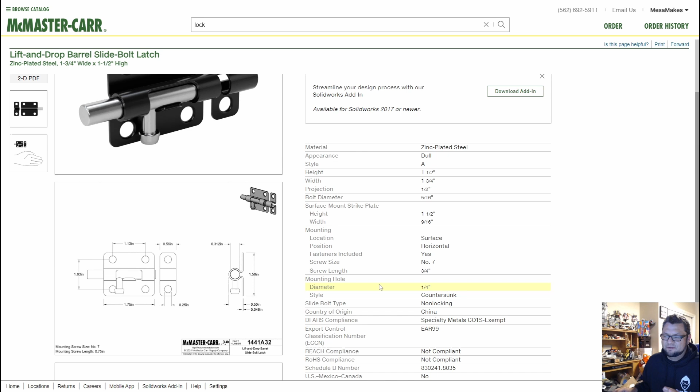So when I was doing this, the reason why I needed to make an account is I needed to know what size these fasteners were going to be that went in here, and it tells me number 7. But I figured out some workarounds and some cool things that we can do. So let's jump into Onshape and we will show you what's next.

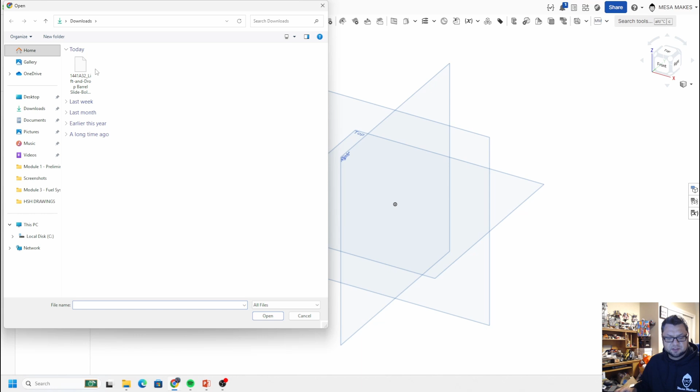So just like always, you're going to want to start a document, and you can do this from the home screen too, but I seem to like doing it this way. So if you click the plus down here at the bottom, you'll see this import button. So we'll go ahead and click import, and it's going to bring you to your downloads. Go ahead and just pick that file that we just downloaded.

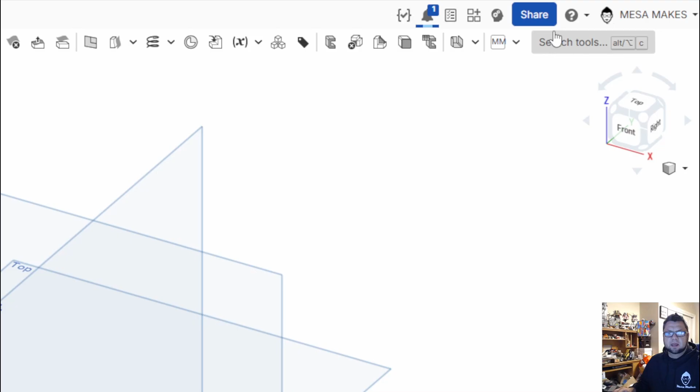Click open, and it's going to ask you if you want to import appearances, import material density. There's a bunch of these different things you can do. Everything I've always done, import appearances, always seems to work fine. So we're just going to say import, and you'll see up here in the little bell, it's thinking, it's loading, and if we click on that, you'll see

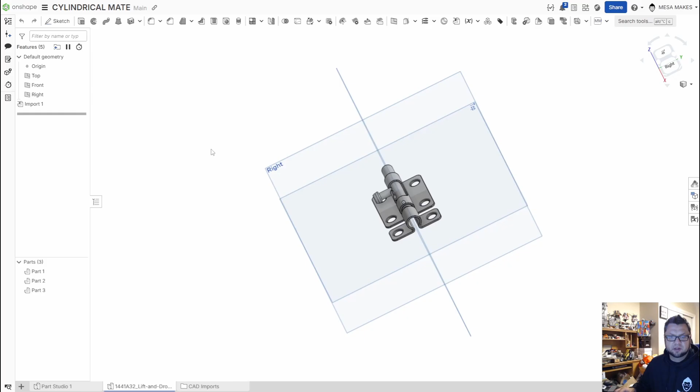it is now completely uploaded. It's taken care of, and you'll see down here at the bottom I now have a folder called CAD imports, and in here I have that bolt. So I can go into this part studio and I can see there is my latch with the bolt, all the same colors. In CAD imports, I can see that actual SolidWorks file, so if I ever wanted to download it again, I could do that as well.

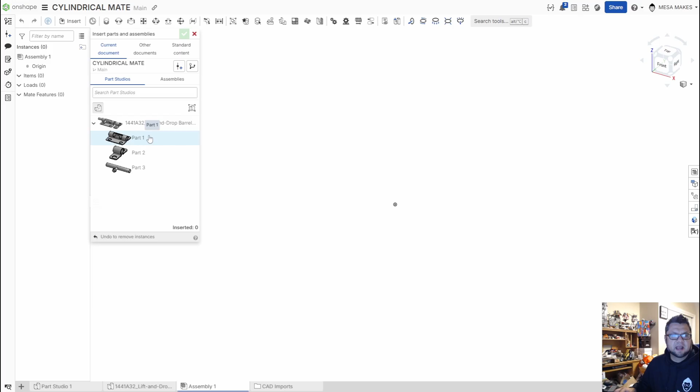But this isn't about drawing on here. What we want to do is insert a new tab and create that assembly. So we're going to start with an assembly, and we're going to say insert from our current document, and I could pick each part individually, but if you click the parent drop down menu, you'll get everything.

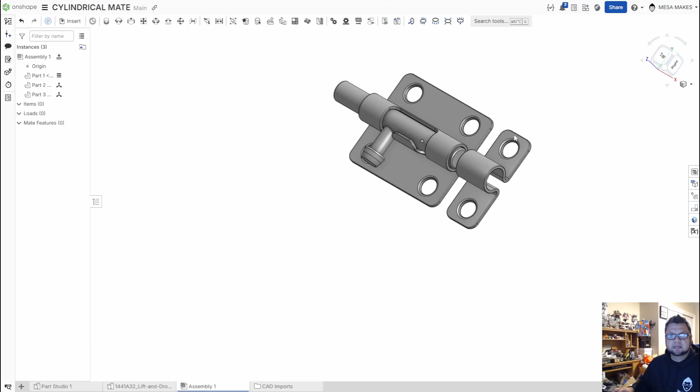I'll click accept, and now we are good to go. So one thing I want to show you is we want to lock this plate. We want to fix this plate in. So we're going to wrap around to the back. We're going to right click here, and we're going to say fix, and now you'll see I can move everything else, including this barrel, but I can't move this plate here.

But to keep things aligned, we're going to do this as well. So I am going to fix that one in place as well, because these two hasps need to stay together. And really all we're dealing with today is this barrel that's going to be sliding back and forth.

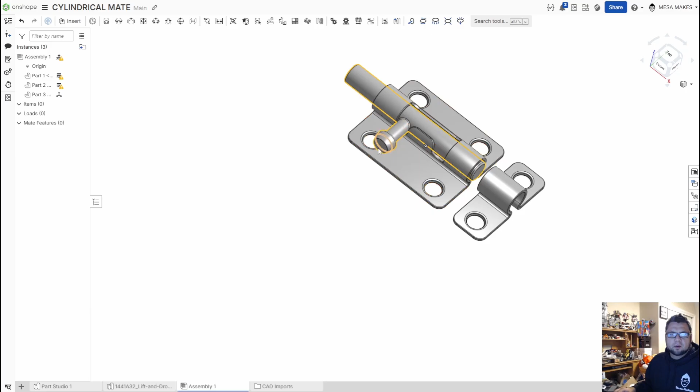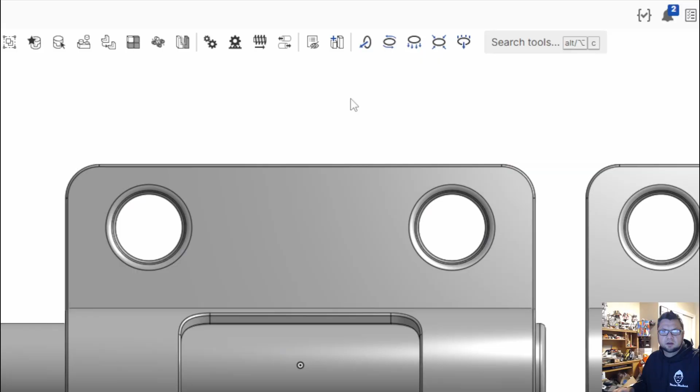So one thing I want to do, just for visual sake and to figure out later on when we go to do our screws, I need a plate. I need something for this to attach to and mount to. I could go back in my part studio and draw it again, but a feature that's kind of overlooked, and we'll do a whole video on this eventually, but if you come in right here, let me zoom in for you really quick, and you see this one that says create part studio in context, go ahead and click that. It'll bring you this menu.

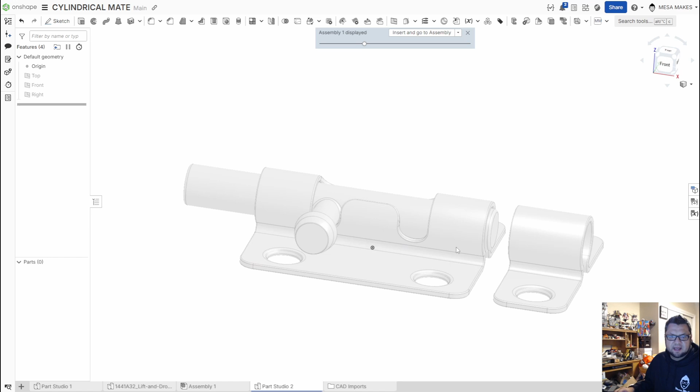So it's asking you to select an origin. I always just pick that center point, and we're good to go, and say okay. It's going to pop you out in another part studio. And what's cool is you see this part. Let me shut those planes off. You can see your part in a transparent, translucent kind of view, and then you're free to just sketch however you want.

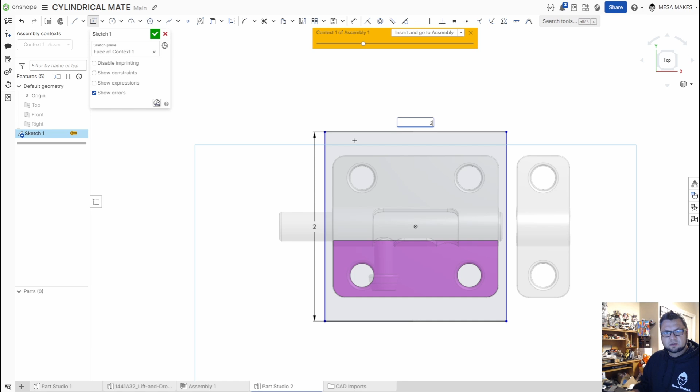So now I'm going to make a base plate for this off that back side, and you'll see now I'm drawing on that face. So we can go to the bottom. I can even draw it from the top if I wanted to. I'm going to do a rectangle and just eyeball some measurements, so it looks like we need to be about 2 by 2. Maybe we'll go a little shorter. We'll go 1.8. That'll get me a little meat on both sides. Yeah, there we go, 1.8.

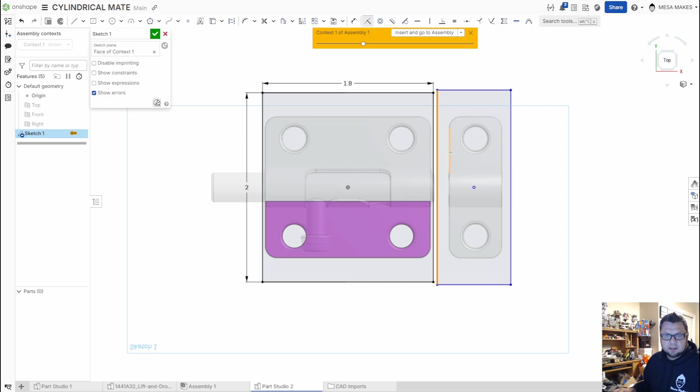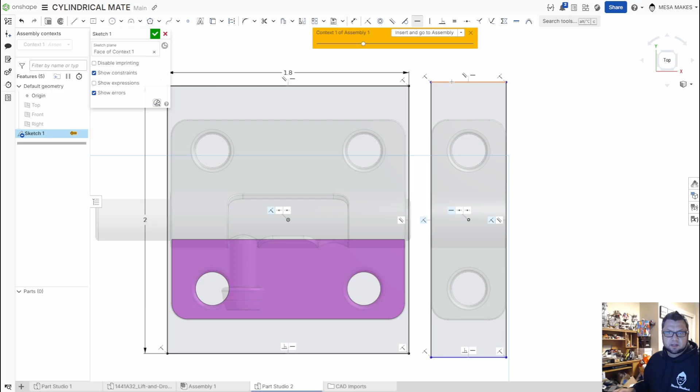And I'll do another one centered here, and we'll tell it that these need to coincide with that. I think I picked the wrong line. There we go. That and that need to coincide with one another. There we go. And I want these to be horizontal with each other. There we go.

We can come in and round all these corners. I know some of you guys that do a lot of the 3D modeling are wondering why I do my fillets before. I learned in 2D, and that's how I have always done it. So we have a plate here now. We'll say accept with that 0.25.

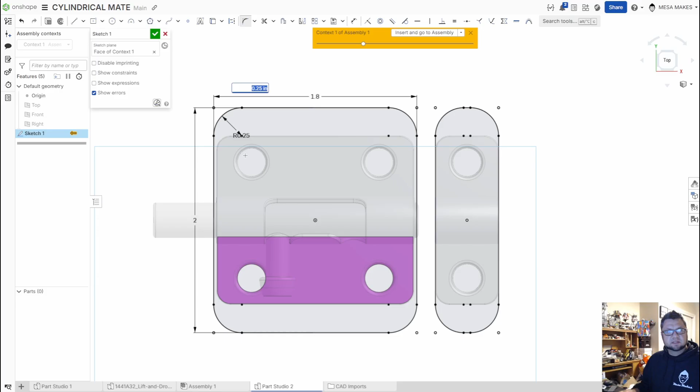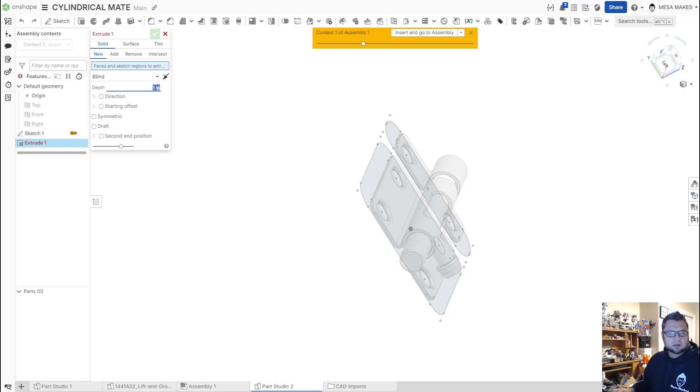I can flip to the other side, and this is crucial that you do this because these are countersunk. I'm going to use these holes, so I'm going to use that back hole on all of these, bring them forward with us. We'll say okay. We'll accept that, extrude, and we'll go out 0.125. No, we'll go 1/4 inch, 0.25.

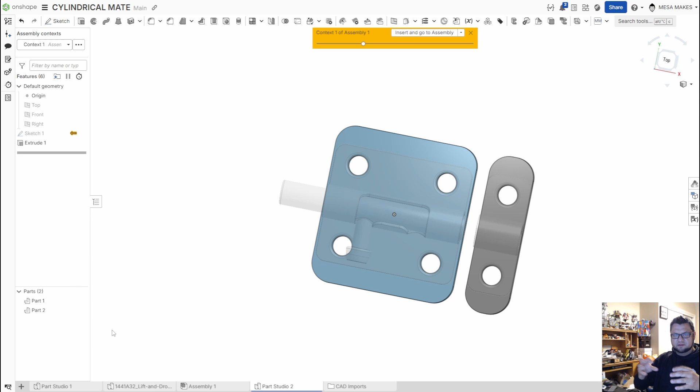And so now I have 2 mounting plates that are made in the design off of the piece that I have. And I know a lot of us are used to doing bottom-up design where we build everything off of the last thing we drew. But this is a real quick way to make something like this. So now I'm going to say insert and go to assembly and select the parts. I want part 1 and part 2. And now it'll bring me back over to my assembly with those pieces attached like so.

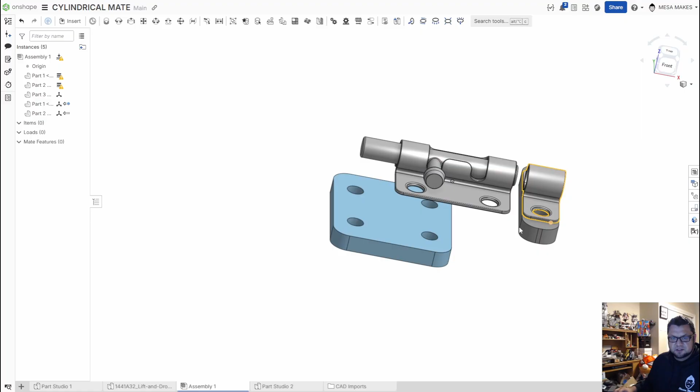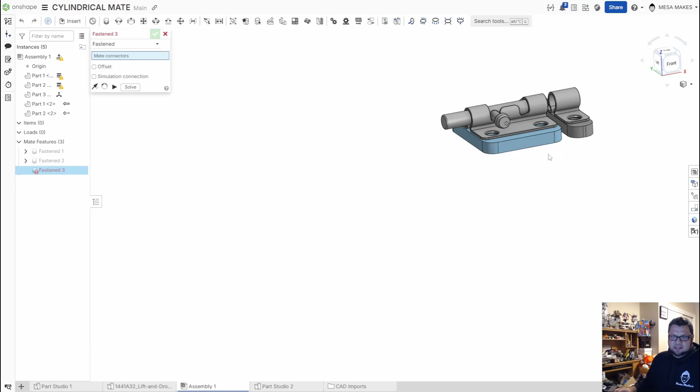Now the only problem is there's no mate to it. So really quick, I'm going to do a fastened mate from this circle to that circle, just so those live together. And we'll do another one, a fastened mate from there to there. Solve that. And now we have a nice little hasp set up, our locking barrel setup.

Okay, so now the real reason we're here is to figure out this piece right here, right? So I've already pre-done the math, but basically if we take this and we rotate this guy, we want to be able to roll up to here and be able to slide and rotate back. So I could use a slider mate and a revolute mate, but that's a lot. So that's where this cylindrical mate comes in. It's allowing you both. If we look at our slider mate, again, it only allows translation along the z-axis, and our revolute mate, if it'll pull up, come on.

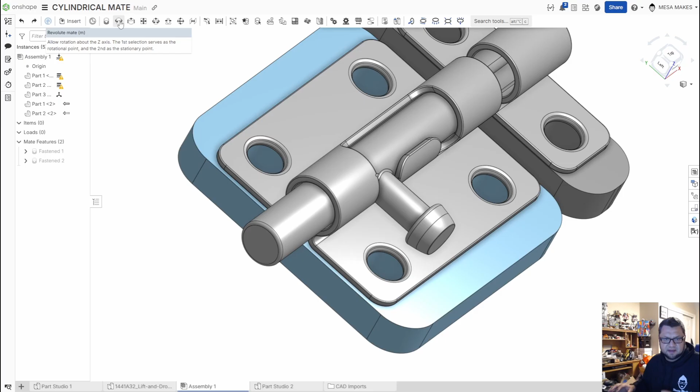Our Revolute Mate allows rotation about the Z-axis, but not always at the same time. Sometimes I end up messing it up. So this is where this cylindrical mate comes in. Now the easiest way I found to do this was to go off of this flat face here and this flat face here. So if I hold and then come to the center, we are now perfectly aligned, and we'll say accept.

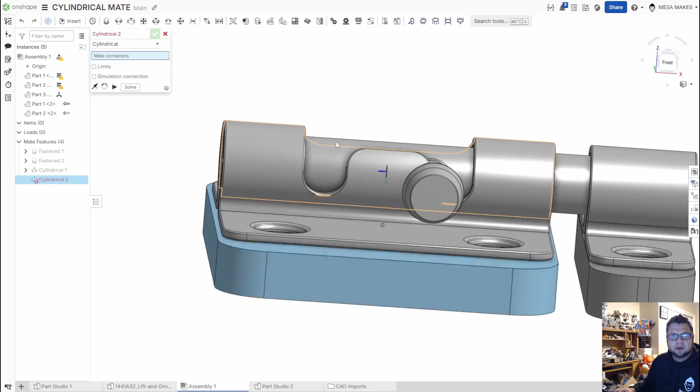The problem we're going to run into, however, is that I have no limits now. So if I slowly start going, obviously I can't go through that in the real world, and I need to stop at some point, right? We don't want this to go too far. It's kind of stuck in here. So we'll undo, get it back to where we had it.

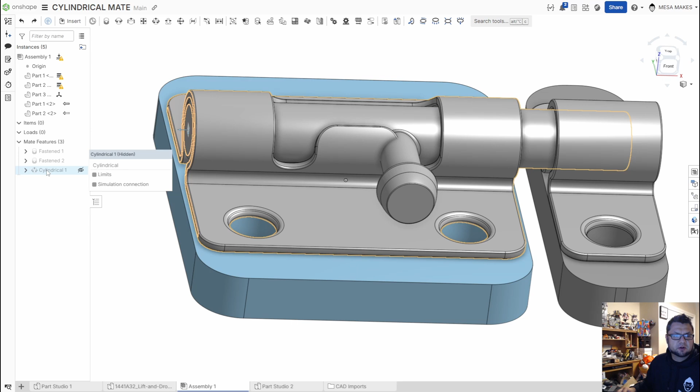Okay. And if we double click on cylindrical, we can click our limits. And what I'm going to do here is I'm going to click limits. And what I came up with for my numbers for maximum and minimum angles, I took a picture of it, sorry, I'm going to pull that up really quick, is the math was for this Z to make it negative 0.109.

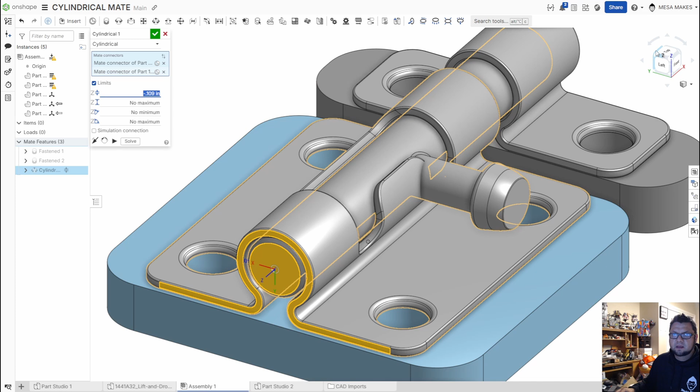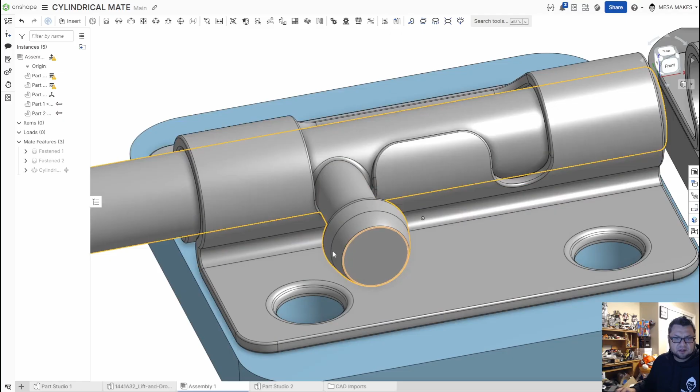And let's see if we go to the right. Okay. The maximum is going to be 0.57. Our angle minimum is going to be 0 degrees, and our angle maximum is going to be 120. So if we go ahead and accept that, I can still run into this problem, but now I can no longer go back this way, and I can no longer go back this way.

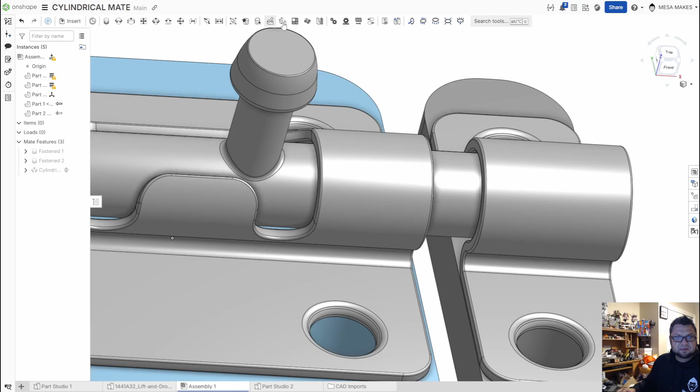And if we go up the other direction, I'm only allowed to go until I hit that bar, and move over the other way, and then come back down and close there. Okay, so obviously it would be great if I could put something here, and I'm sure there is, I just haven't learned it yet. I'm thinking probably one of these tangent mates or something else we're going to learn along the way, or some other combination of stuff. But again, I'm learning just as you guys are.

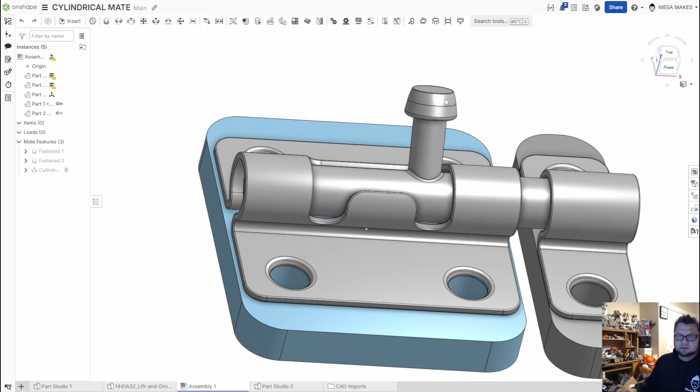But for every project I would need to do, this is going to showcase how I would need to do it. If I was showing a customer, I think I would probably just make sure I don't cross over the seam here. If I was doing an animation of some sort, just make sure you show what it's supposed to look like and how it's supposed to look. So that's going to do it for that part there.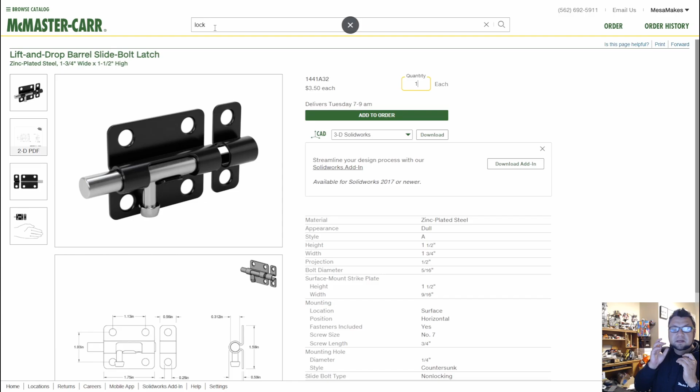But now you guys are probably wondering, well, this isn't complete. How are we going to fasten anything here? Well, if we come back up to here to insert, again, I could switch back over to McMaster-Carr, and I can pull in some screws the same way, right? However, Onshape has this really cool feature where you can pull from your other documents, but you can also pull from standard content. And this new feature that I found, I don't know how long it's been out, but it's really, really cool. So you come in and pick your standard, ANSI, DIN, ISO, any of your deals. We're going to stick with ANSI.

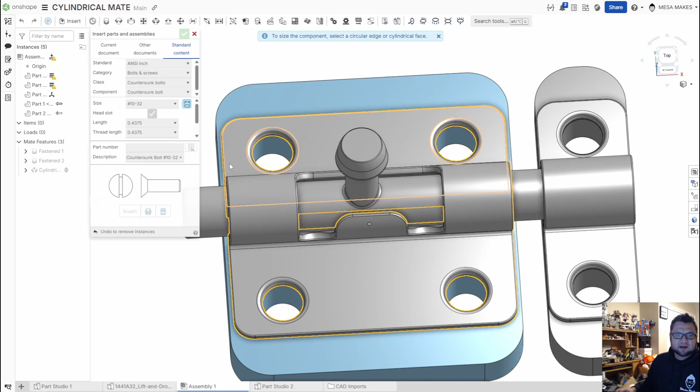But you have this auto size fastener, and literally you just pick the cylinder wall. So let's say that I had this at 1-8. Well, if I were to use this and click insert, it's going to allow me to put a 1-inch bolt in that hole, and that's obviously not going to work. That's way too big, right?

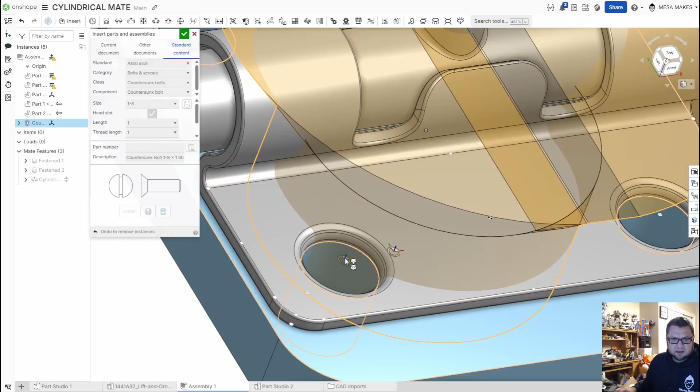But technically, and this is where when I've talked to people in industry about students coming out and some of the issues, they're making stuff like this that can't actually exist. You can't actually make it. So I'm not really big on, let's undo that, on imaginary things, but maybe you don't know exactly what that hole size needs to be, right? But for quick, you can get auto size fastener.

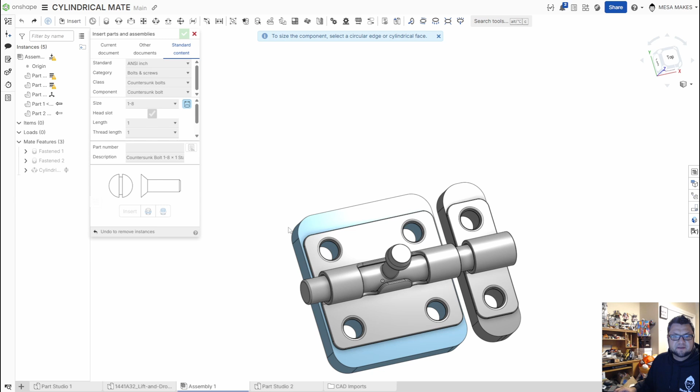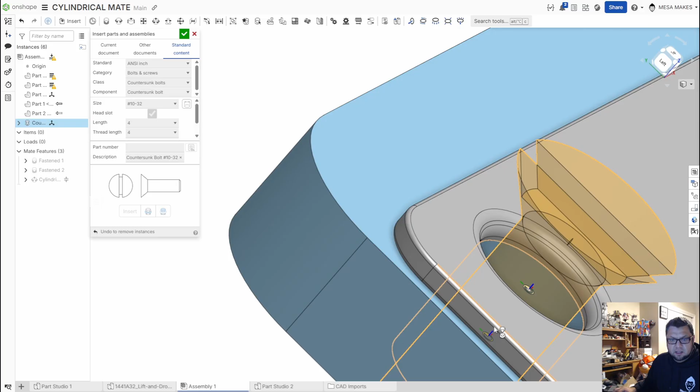I'm going to click there, and now it's picked everything I need. I can come in here and change the length. Maybe I want that length to be 4 inches, and I could set my thread length, whatever. We'll say insert, and now I have these bolts ready to drop in, and I can just go in and add threads. Maybe I want a 4-inch, a 1-inch. We'll say insert.

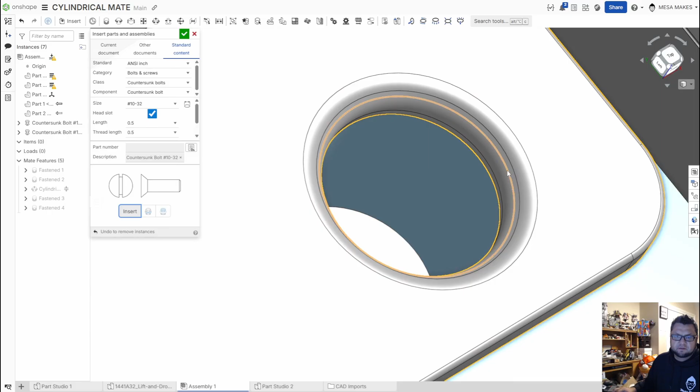We'll go to there. Maybe I need only a 1/2 inch bolt. Remember, our plate's only a 1/4 inch. Maybe I want to show the different variations or whatever. And we have that one. I want to do that one again, so I would just click here.

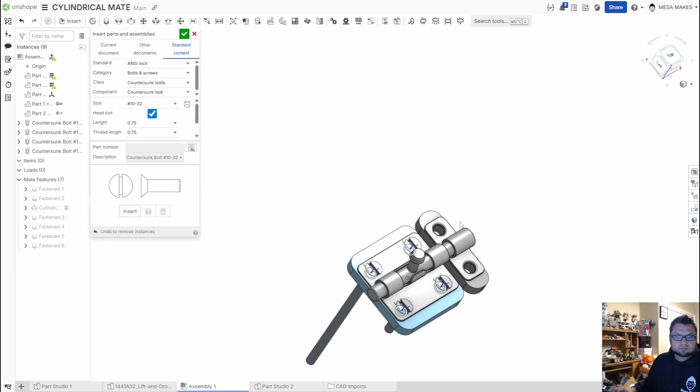And I could change again. Let's change one to 0.75, and we'll put 0.75 on these guys just for sake of doing it. And insert one more time, and we can go from there. So pretty cool little deal to be able to show off what's going on.

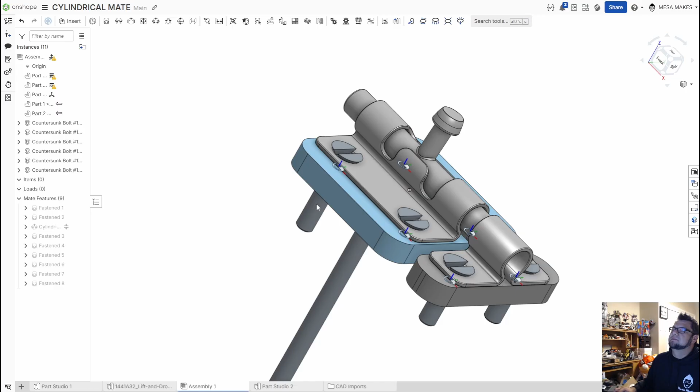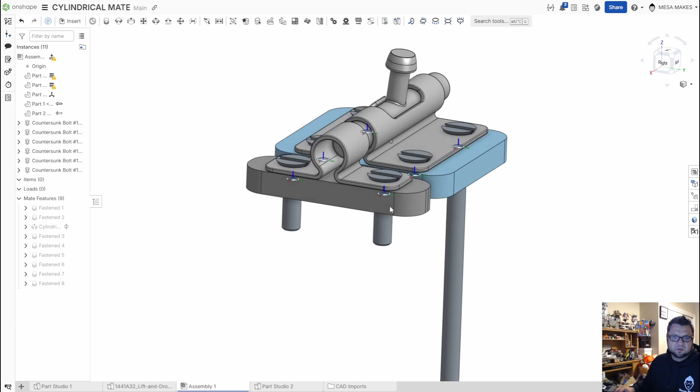Some things I noticed, if you don't add those fasten mates, sometimes you add that plate in, you think, oh yeah, well, I put a bolt in it, I put a screw in it. You got to make sure that these mates that attach the latch to the blue and the silver, like wood, I guess is what it would be in this instance. It could be metal, I guess, too. But the plates, yes, you put a screw in it or a bolt in it on the computer, but it doesn't know what's what.

I could also add a relation here if I wanted to. It might have been easier to do, but I liked dealing with this right here and limiting how much angle we could do here. So one other thing to note, let me pull this around really quick. I could come down here to that cylindrical mate and say animate, and I can animate each one and see, step that up a little faster, let's go 100. I can show what that would look like moving back and forth. The problem is it's cutting through that little lip right there.

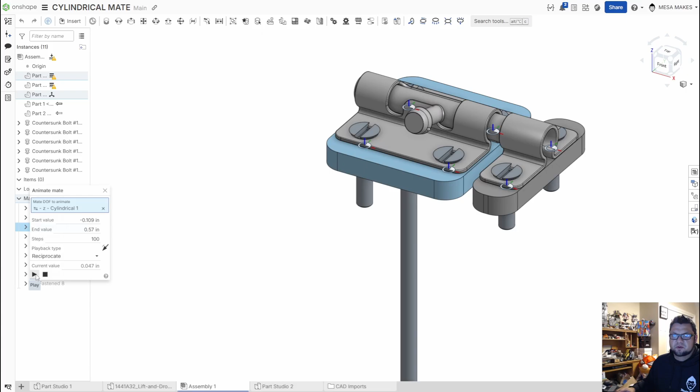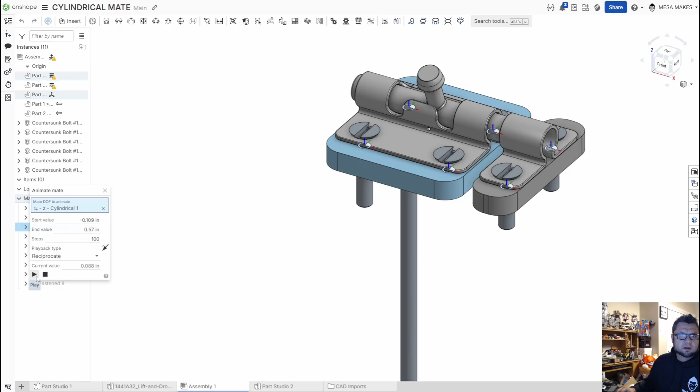So before I would animate that, what I would do is bring this guy up. We'll do animate again. Animate my linear motion. We'll say OK. Step that up to 100. And we can see that guy move really, really well.

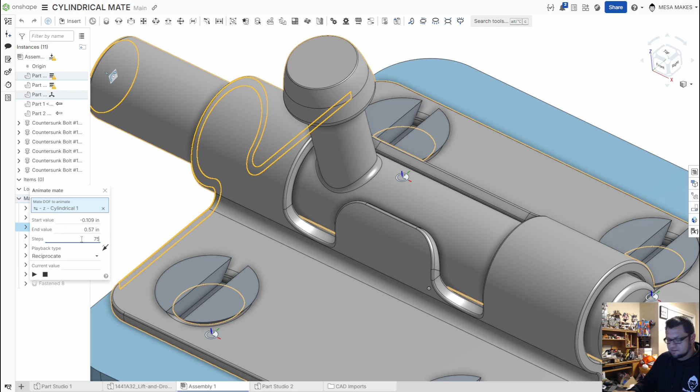Let's move it just a hair more. There we go. I was running into some issues. It was hitting the wall there again. So same thing. Make that a little faster. Let's make that 75. And you'll see it moves without any obstructions, and we can see that it's stopping when it would stop, and it's stopping at the extents of that slot there.

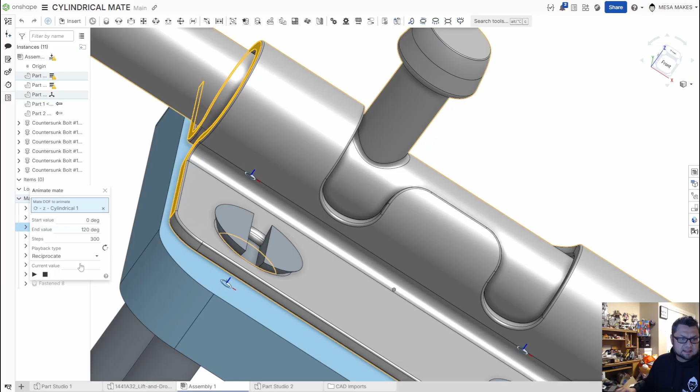After that, I could do the same thing here, and I could show animate, but this time picking that Z, and I could let it reciprocate back and forth to kind of see that moving up to its extents and then back down. So pretty cool little thing you can do.

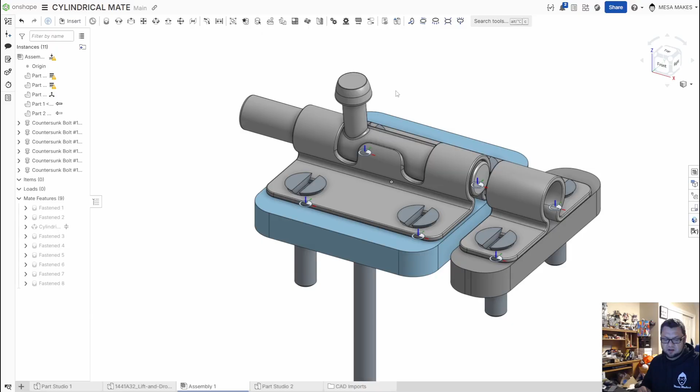I know I saw somewhere that somebody is working on a multi-mate animation script for Onshape. I haven't quite seen it yet. I haven't messed with it enough. But obviously this would be one that would be really cool, where it could go up, then over, then back down on that rotation. So the more you learn about the mates, the better these tools are going to start being. So that's going to pretty much do it for us today.